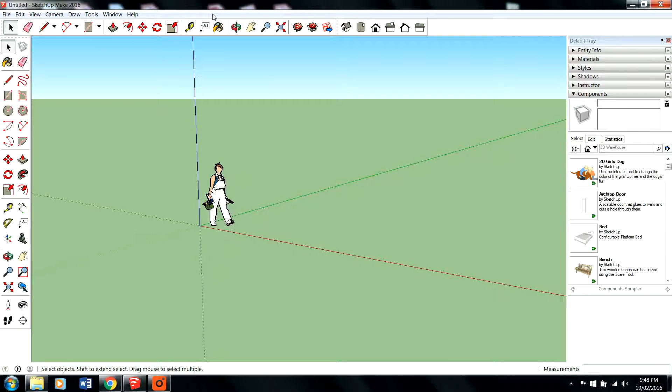I've got the greenhouse here, and what I'm going to do is make a quick drawing, because the last greenhouse file you sent me had the greenhouses seeming a little too big, but I'm not sure if maybe you drew them in metric. In any case, this video will be a really good help on how to start this and set it up.

So I'm looking at the drawings right now, and we've got the 4 greenhouses that are 36 by 100, and we've got the shack out to the side. I'm looking at the page that says PG Wheeler on it, so if we're both going to work off the same drawing, that might be the best way to do it.

So to start, we'll go camera, parallel projection, and then pick the top view. In the other video I show you that it's the top - if you don't have this view, it's in the toolbars. So now what we're looking at is just a projection looking down at basically the 3D SketchUp world.

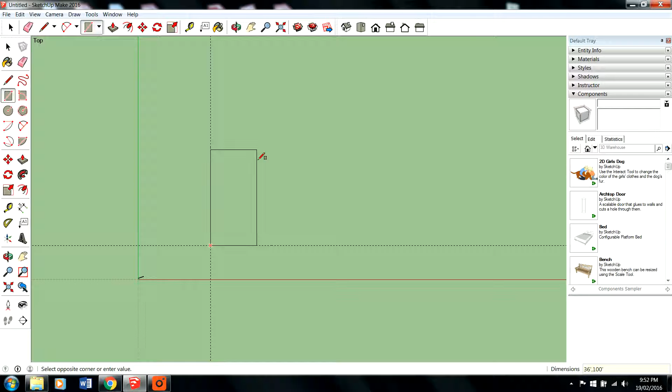And we're going to type in 36 feet, comma 100 feet. So down in the bottom right, you should have 36, 100 feet. Enter. Now we've got our first greenhouse right there.

So from the looks of the drawing, I think that's a 7 - I think they're 7.5 feet away from each other. So again, we'll grab our trusty tape, and from this edge, we'll go 7.5 feet.

A quick and easy way to do this for the next greenhouse is we'll just copy and paste it. So grab our selector tool, drag right to left, highlighting the greenhouse, go to move, and hit option, so then you get that plus. I believe it's option, but if not, it might be one of those 4 buttons near the spacebar.

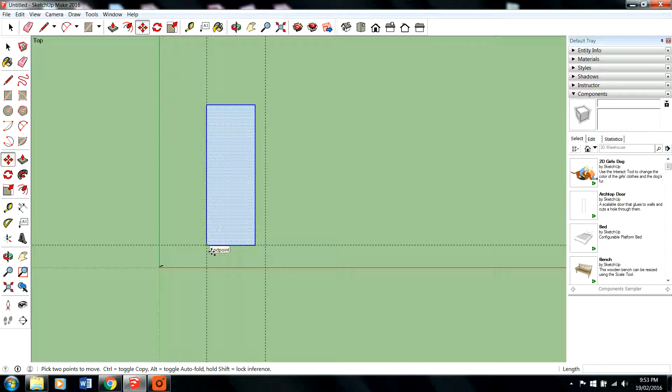But I believe it's option. So click that so you get the plus sign. Grab this far bottom left corner of the greenhouse, click it, drag it over, and now you've got this.

So if these are all 7.5 feet away, we can make the work easier - highlight this, grab this construction line. So if you highlight this greenhouse and then hold shift and drag left to right across to get this construction line.

Then we'll grab move, and everything should still be selected. And then we'll click option to get the plus sign on the move tool. Grab the top corner of the other greenhouse so we know where we're setting back from.

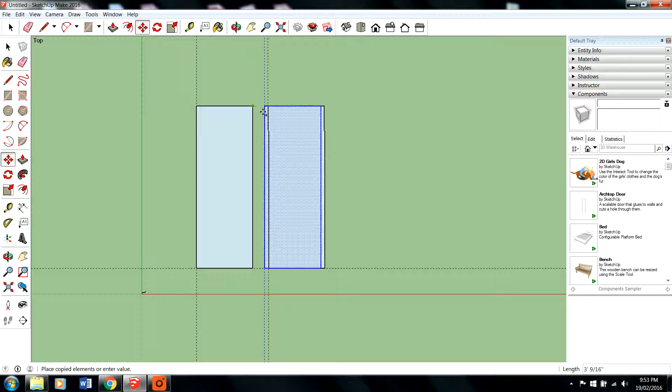Click, and then just drag it over once, and then hit option again to get the plus sign one more time because we still have all this geometry selected. Click and do that.

So now we have 4 greenhouses set back 7.5 feet away from each other, set back 16 feet from this red line and 35 feet from this line. I'm basically just going off of the drawing that you gave me, so I hope I'm doing this right.

Next, I guess the next biggest thing we can grab are the tanks, the 6 water tanks.

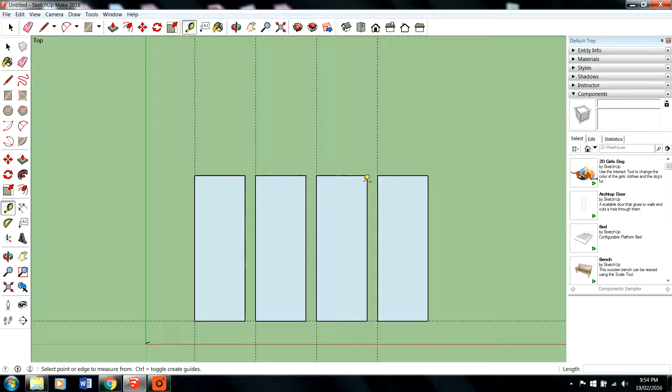So it says that the first two tanks are 35 feet away from the greenhouses. We'll grab our tape measure, get a construction line, and go from, it doesn't really matter which edge you pick, as long as we pick an edge from one of these greenhouses. Click the edge, pull it up, type in 35 feet.

Now we have a base point for where we're going to draw those tanks. From the drawing, it looks like it's in between the first two. If these are the first two greenhouses here, it looks like they start right here-ish. So that's good.

I'm trying to figure out, I'm not sure how big these tanks are. I'm just looking through the drawings now. I'm not exactly sure, but I think there might be a number here.

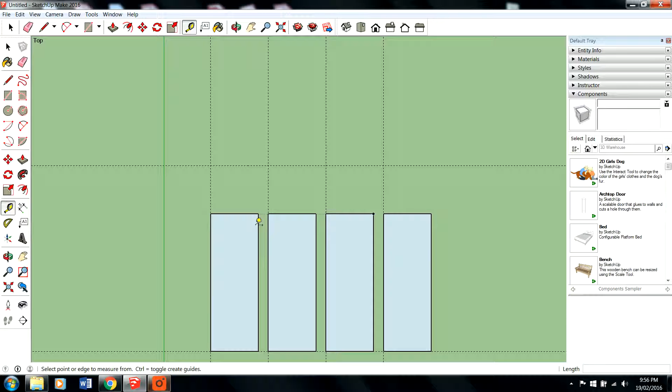It's hard to... uh-oh. Oh, I don't know why that's happened. Okay, I don't know why that popped up.

Because it's Windows and it's silly sometimes. Okay, just from the drawing, I'm going to draw circles. Let's go with a 10-foot radius. Actually, they look smaller.

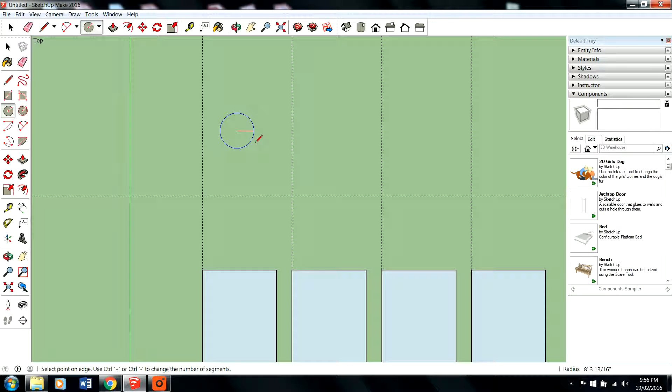Well, let's go for a 6-foot radius. 8-foot radius, sure, so 8 foot. Yeah, that looks pretty close. So what I did was grab a circle, click, and specify the radius at 8 foot.

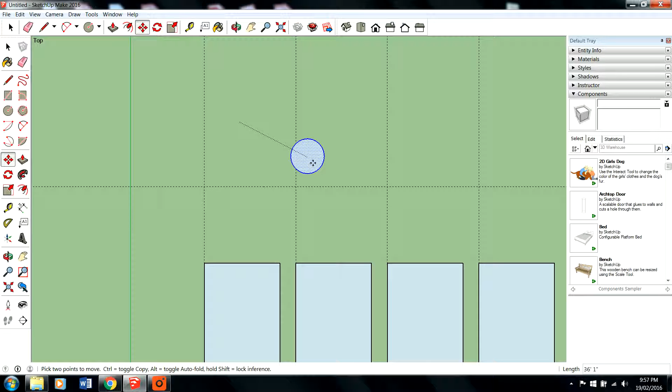So what we'll do now is grab this circle, move it right to left, and since we want the bottom edge to line up with this 35-foot mark, we're going to grab the end point of this circle and just place it here, like that. So that's that tank, and it says that they're 6 feet apart.

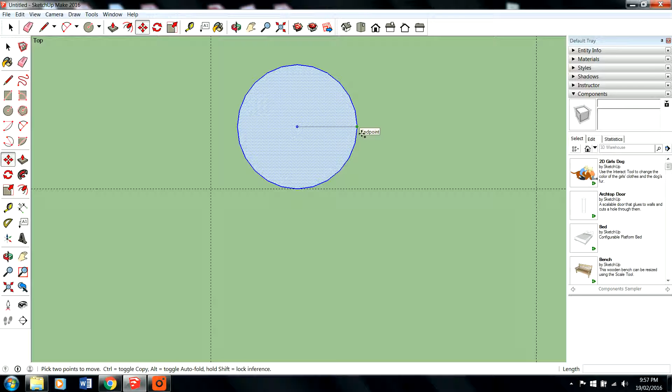The way to do that would be with your move tool still engaged and the circle still highlighted. Click your option and make sure you're at this endpoint right here, like this. You don't want to grab here, you want to make sure you're grabbing right at the endpoint. Click, and now you'll have this.

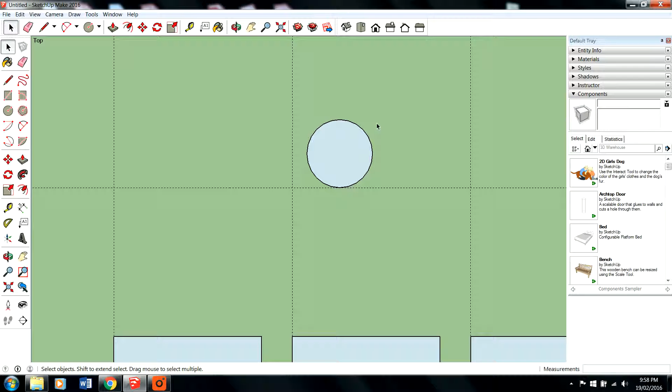From this point, you know what we'll do? Just because I don't want them to lock in place and get stuck together, we're going to make this a group. So highlight the material, right click, make group. Now the tanks are a group. We'll make these a group later, but for now we'll just make the tanks a group so it's easier to copy and paste.

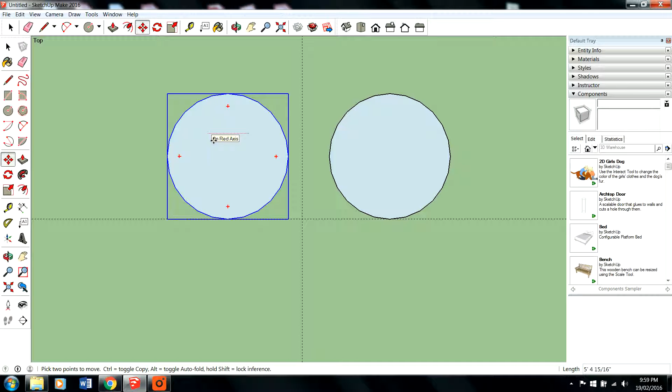From here, grab move, hit Option so you get the plus sign, which is copy. You're going to want to get the endpoint of the group, click, and copy it over so that it's touching this other one. Then grab the move tool, click on it, move it to the left, type in 6 feet, and now we've got the tanks offset.

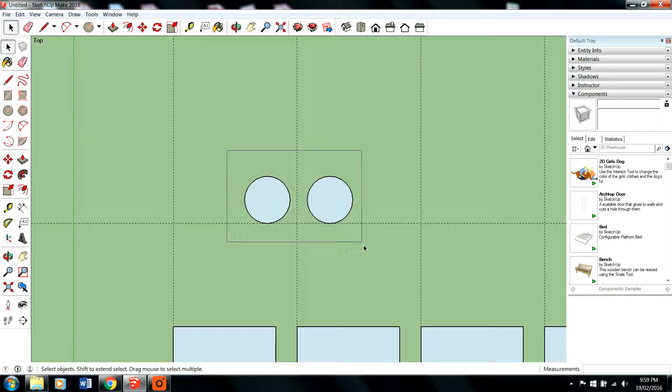I believe they're probably 6 feet away from them, from north to south. It says 33 here, so I'll highlight these, grab move, click Option to get the plus sign, copy here, and then hit Option again for the copy-paste feature.

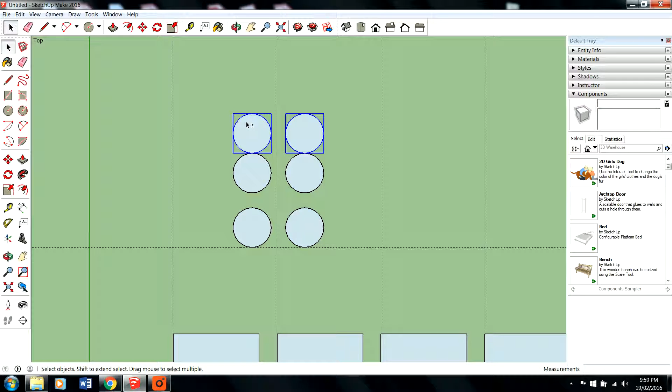There. How are we doing for time? A couple minutes left. So grab these, move them up 6 feet, then grab these and move them up 6 feet.

So now what we've got here is a basic outline to scale of just the greenhouses and the tanks for now.

I guess later on we'll get into everything else, and we'll get into how to slope the land properly, because you said that the land kind of slopes away from these greenhouses. But that's all for now. Hope this wasn't too confusing, but it shows you how to use grid lines and how to make everything a little bit more precise, because in SketchUp you can get pretty precise with it too.

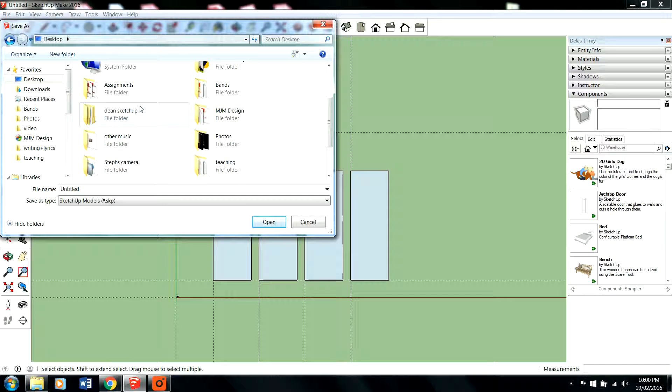So I'll save as, and what I'll do is save this in Dean's SketchUp folder, and I'll call this greenhouse max version. Yeah, okay, good. Save. So now I'll send this to you, and we'll get over on the next lesson.